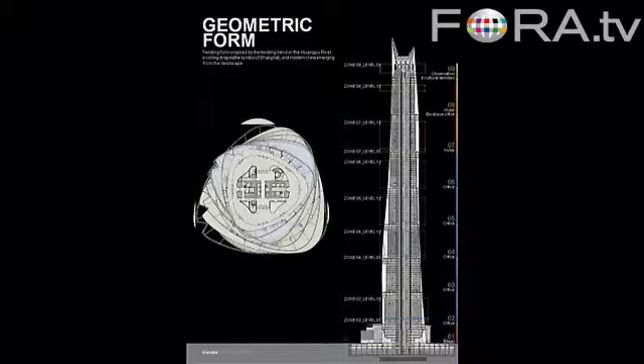The form of the building is really a combination of art and science. It's a twisting form inspired by the bend in the Huangpu River, a coiling dragon. Some say it looks like a coiling dragon, a symbol of Shanghai, and some say it is emerging from the landscape. I think it's really all of those things, and those are some of the metaphors we use. The science part is about shape and geometry, and it will be the world's largest double skin building.

It's pretty phenomenal. The exterior skin is actually going to be a cable-hung structure. It's a combination of office, hotel, residential, convention facilities, and entertainment and cultural space, tying into mass transportation systems at the base of the building. Currently, it is 632 meters, 2,075 feet.

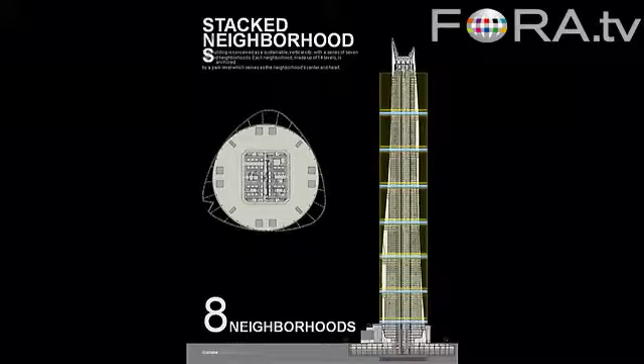The concept was a vertical city, a sustainable vertical city, a series of 8 stacked neighborhoods. Each neighborhood is made up of 14 levels, so basically it's 14-story buildings stacked on top of one another. Each of these podium areas, as you move from stack to stack, is conceived as a park, and Shanghai, as many of you know, is a city of parks.

Each park has a 14-story atrium space that brings fresh air into the building. It's going to work like a traditional park, with places to eat, entertainment venues, places to rest, really trying to create a sense of community.

It is really difficult to get your arms around a building of this size. What's interesting is that, unlike Mori's Tower and unlike the Skidmore building, Jinmao Tower, this one will be open to the public. All these public parks will be open, so it will basically be an open kind of format.

It has an intelligent skin, two layers of glass, actually two curtain wall systems. We designed a frit pattern and modeled it over the entire building, so the frit pattern changes from pane to pane as you move around. It's designed to minimize heat gain and maximize daylighting and views.

With a building of this size, one of the challenges we had was modeling what it's like looking through two curtain wall systems, when at some points they're 5 feet apart and at other points 30 to 35 feet apart. Visually, you start to get reflections from the outer curtain wall system onto the inner one.

There are wind turbines at the top of the building. This is really more symbolic, I think, in a lot of ways.

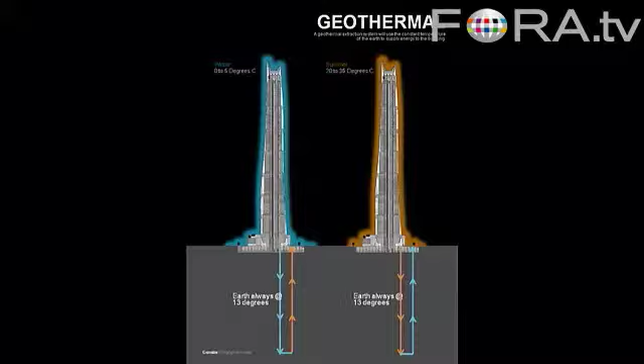There's enough energy that's going to be created to basically run all the exterior lighting in the building and much of the lighting in the park areas. We're utilizing geothermal energy, a geothermal extraction system. The building's HVAC is designed with a tri-generation recapture system and an ice plant.

Just in terms of water efficiency, we're going to harvest rainwater, recycle gray water. We're looking at black water. And yes, it is housed with low consumption urinals as well. Those are the simple kind of things. At this point in time, we believe the water consumption is going to be reduced by a minimum of 40% over a conventional design. That is 675 million liters annually, or about 245 Olympic-sized swimming pools.

I think what's most interesting is that it's actually one cylindrical building with an outer skin that turns. So the question is, how much did we want it to turn? Part of it was symbolic, but much of it was really driven by what is the most efficient form. As we started to model the different forms, a couple things happened. As you turn the outer skin, because the outer skin is triangular, it distorts along the edge of the building visually, so it looks like the building is beginning to wave. So that was a consideration.

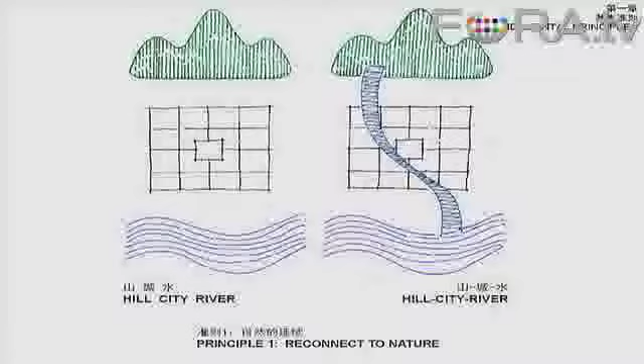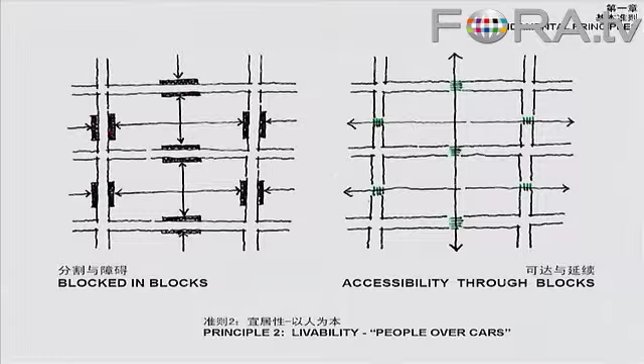The second fundamental principle is this is a city that's hemmed in by roadways where the car has dominated. We want people to dominate over cars, create throughways, and get people back in control of their environment, and in addition, to use more public transit.

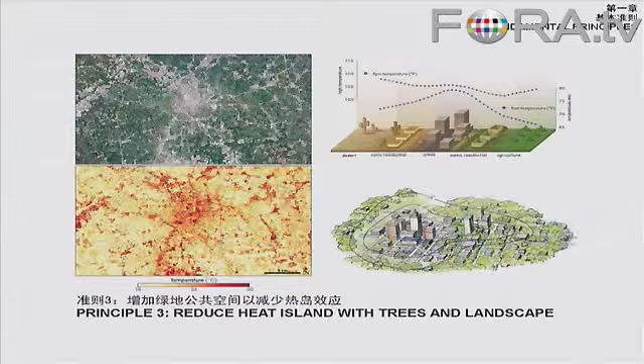The third is to really focus on the heat island effect. It's not talked about much, but cities generate heat by the very virtue of the impenetrable pavement and concrete that the buildings make. Cities like Bangkok, Guangzhou, and Shenzhen actually raise their own temperature because they do not deal with permeability in a good way. Of course, we also deal with the other issues of transit, general energy consumption, and water.

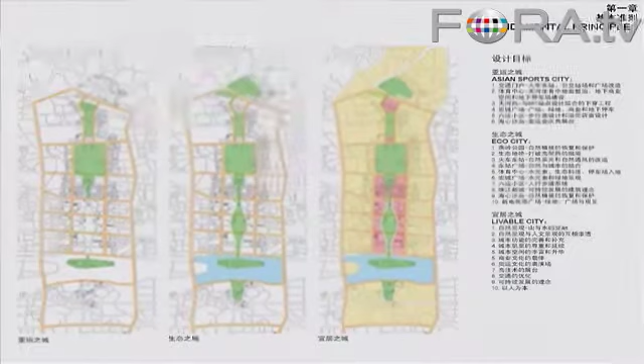So our plan is really three plans. The first is the Asian sports city, because we got to deal with the Asian Games. The second is the eco city, coming back to nature. The third is the livable city, which is the reconnection of the city to itself, instead of being divided up so that people can't go anywhere, and then jump in a car and sit in traffic — really bad traffic there. The way we affect these things is through a series of major nodes that will reconnect the city for pedestrians.

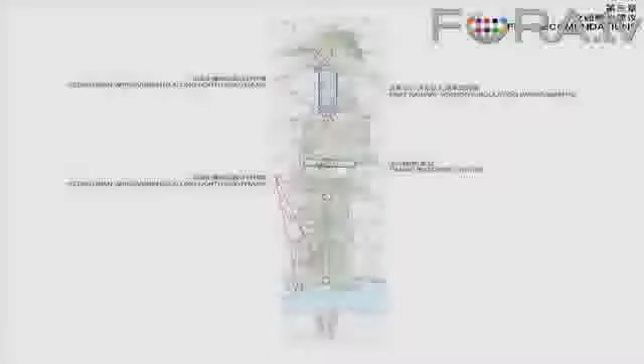First is from Yanling Park looking south. You cannot get from the north part of the city to the rest of the city very easily, if at all, because there's a major highway and railroad tracks, and the only thing they have now is a tunnel, with somebody there who charges a fee if you want to walk through it.

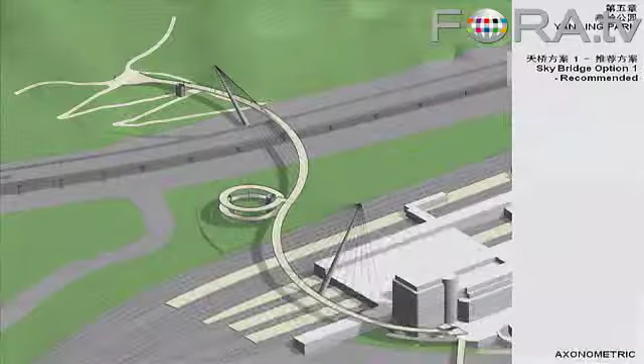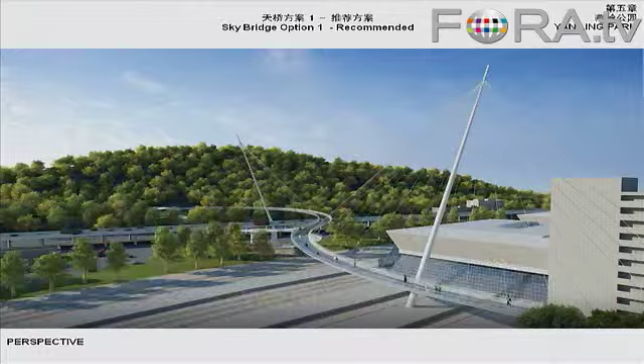So the first piece is to create a major pedestrian connection from north to south of the city, a footbridge which serves as a linking element as well as a kind of symbol of the entry into Guangzhou — it's been done beautifully many times worldwide. We've created a linking plan that takes you from the park and the communities on the north side to the railway station, which is the building in the foreground.

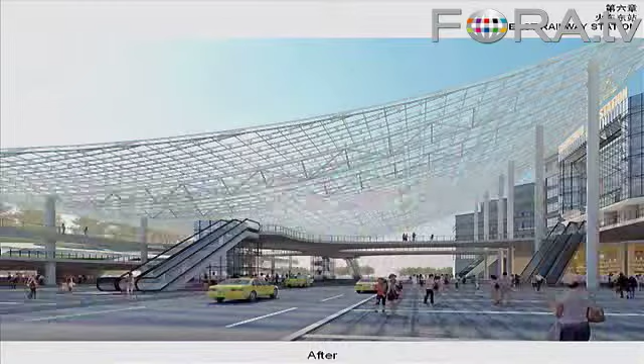So we completely redesigned this. We're tearing it all off and creating a real entry to the city, built of glass with built-in photovoltaics. Someone was talking about photovoltaics and their expense — well, this is a place where you do photovoltaics in a big way, because you need the shading. This place is hot, so the photovoltaics will not only generate a significant amount of energy, but will create shading as well.

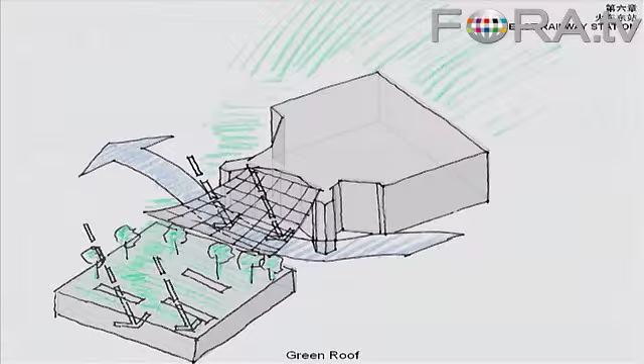And we get rid of the heat island, moving to a more ventilated situation. We also recognize the shading of trees, so the whole plan coming down through takes water and trees till we get to the sports center, where we redo it in the same way — changing this kind of thing using pedestrian crossings into a greener, more open place.

Probably the heart of it is here. This is a BRT station, Bus Rapid Transit, being introduced into Guangzhou. This is Tianhe Road today. It's a complete barrier. Our plan is to drop that road so people walk at grade over it, clear up traffic issues, and create a BRT station, a strong element which will encourage people to use it, linking not only to the sports center but to major shopping.

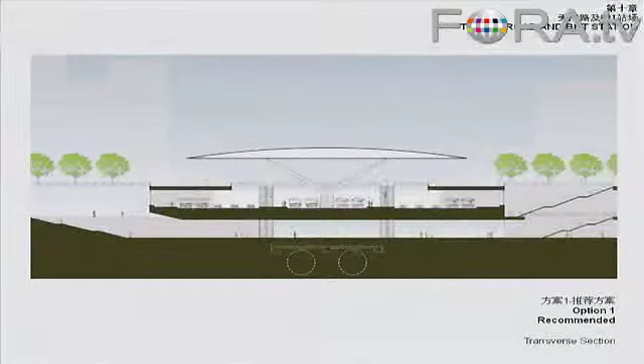Right now, this is the new Expo in Shanghai. This is an example of the kind of construction which can be done well and quickly in China, and the kind of thing that we do.

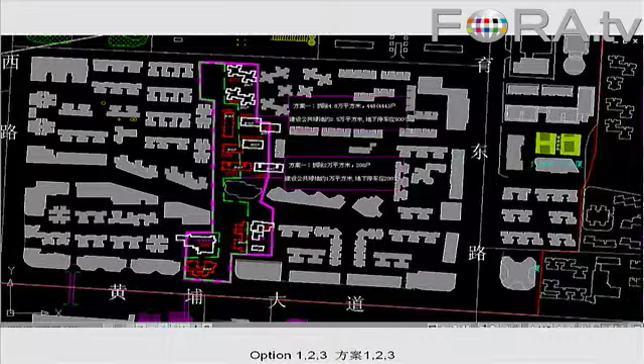The city was going to tear out a big chunk of the existing neighborhood, and what we went back and said is don't tear any of it out, just redesign it and create a major pedestrian way with retail integrated into the community. So we've put preservation as part of this.

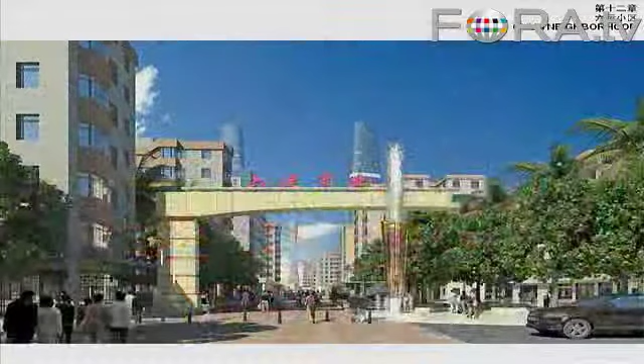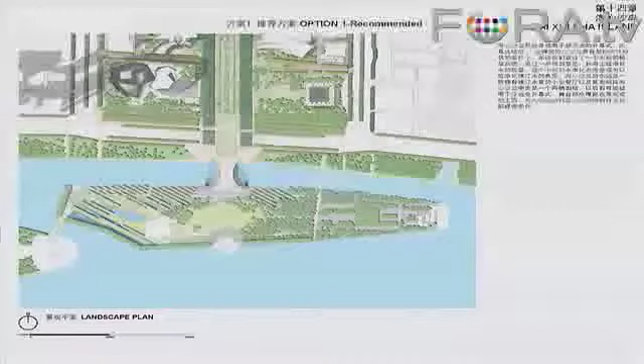Further connections, a bridge which replaces a tunnel. This is a road that couldn't be lowered, but a very elegant, light bridge. And other connections into town until we get to the island, where we integrate an amphitheater, then tie from the river all the way back to the mountain. So there you go.

I love architects, I gotta say. What an amazing profession. If I'm reborn, I want to come back to be able to do this kind of work. This beauty, design, living, all combined into this amazing thing.

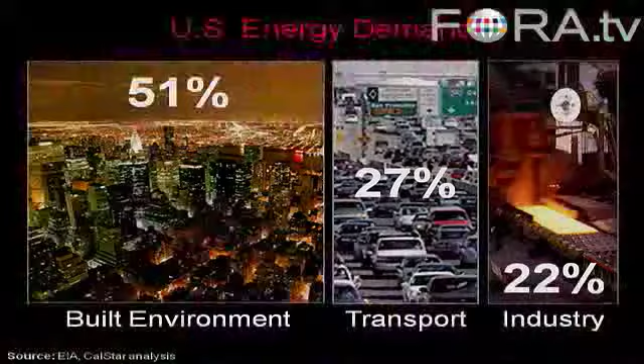The built environment stands as the 51% consumer of all the energy we produce in the United States, half the energy. And even more of CO2, the built environment is responsible for 55%. So there's no way we're going to solve energy issues, climate issues, and jobs and economic recovery, without taking a hard look at the built environment. That 51% means everything else, transportation and manufacturing, is the other 49%, with a tiny piece for agriculture. So it's really the big one to focus on.

Break that down. About 39% of total U.S. energy is used to operate buildings: cooling, heating, lighting, appliances, things of that sort. On top of that, there's another 12% of total U.S. energy embodied inside the materials that go into the buildings these chaps design in, that's cement, steel, glass, drywall, bricks, more or less in that order. So that's where the half comes from, and you see the breakdown between residential and commercial. A lot of it is residential.

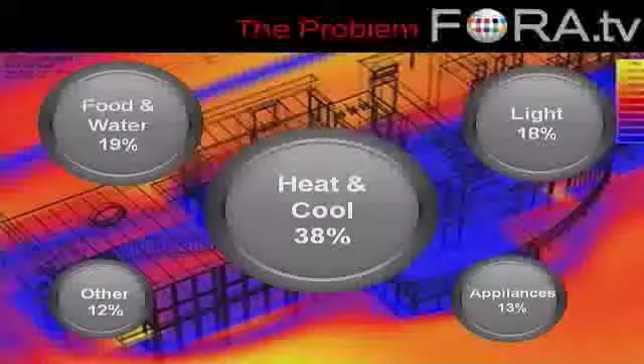Let's not forget that. The problem is well understood and well documented. We know where energy is being used, and we know where to get rid of it if we're talking about building scale. We'll soon talk about it at mass scale. Now let's take a look at this country.

These data are amazing, you probably know them. The new urban environment - people who want to move into urban environments in China - 350 million people, needing housing, shops, schools, stores, police stations and everything else. Coupled with the Minister of Construction's desire and NDRC's desire not to encourage urban migration, this means another set of infrastructure, housing and schools for 250 million people in the countryside.

That's the scale. Let me give you a sense of that scale in square feet. The United States today has 300 billion square feet. By the year 2030, we'll move to about 400 billion square feet. China is probably going to build 400 to 500 billion square feet new in the next 20 years, both urban and countryside. So China is going to build approximately one to two United States in the next 20 years.

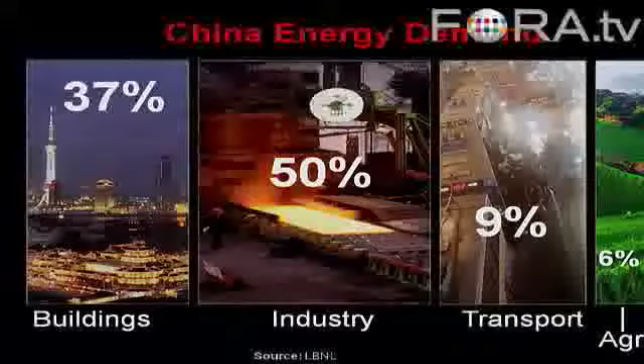Okay, so let's take a look at China. 37% total energy, outsized in terms of climate change and greenhouse gases, because most of China, as you well know, is driven by coal. And so that explains that. Here's how the breakdown manifests itself: 23% in operations, again mostly residential not commercial, and another 14% - actually more than the United States - in buildings and infrastructure, which goes for cement, steel, glass, and things related to that.

Let's talk about China - these data are preliminary, courtesy of work that I did with Mark Levine and some of his team. They're subject to change, but they tell a story that directionally is very, very important and quite dangerous. So if you want to pay attention, this is the time to do it.

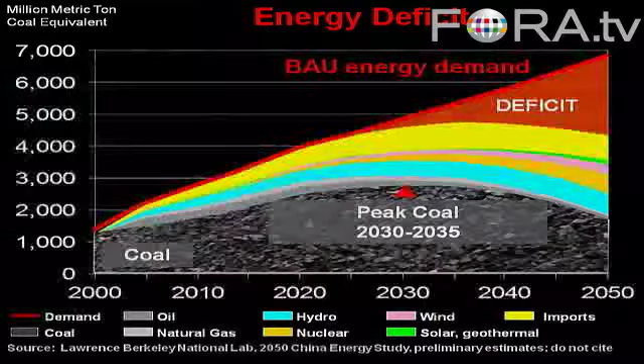An energy-driven deficit means an energy-driven recession. The fundamental contract that the government has in China, as we all understand it, is that we supply continued economic well-being on a per capita basis, and the people give us their loyalty and their obedience, more or less. I apologize for abstracting that so much, but that's the idea - our job as government is to provide increased well-being, and we're not going to be able to do it with an energy-driven recession. And that recession will come if we don't solve the problem.

Question: how do you solve it? You either increase the supply of energy - and some of us, theorists and practitioners, think it's going to be very hard to exceed these numbers, very hard to create more supply - or the obvious other place to look is to reduce the demand. One has to reduce demand in the three major sectors: the built environment, manufacturing - meaning both the style of manufacturing, the technical processes, and also the mix of what it is we're manufacturing and exporting - and transportation. If we hit net zero energy, a very difficult goal for any country including China, although China is reasonably well equipped to begin prosecuting standards.

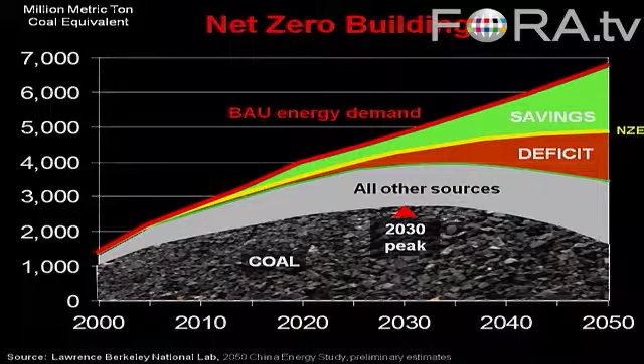If we hit that, we might be able to decrease the deficit and the energy-driven recession that we see coming for China by maybe 30, 40, or as much as 45%. A big deal, a very big deal. That's what we have in mind for China, and that's why we're promoting net zero.

Current course and speed, danger path. The way the built environment is coming together, the tremendous explosion of residential and commercial, urban and countryside, spells danger. Those buildings will substantially, unless they're Gensler buildings or Heller buildings, look like Western buildings. They will eat China out of house and home.

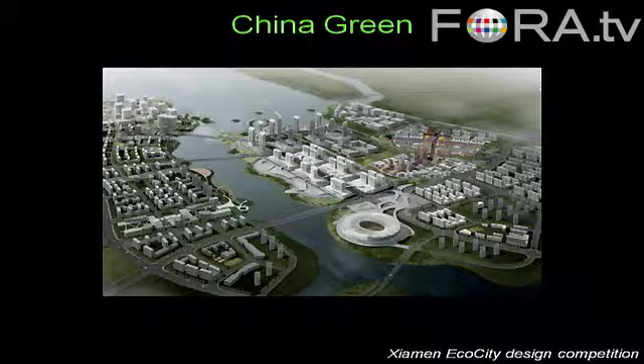A big danger. The other path is obviously the one we're discussing at this conference, and what we all hope we focus on really intently in the coming years. China Green is a dream. There are various examples - some are successful, some are less successful, some are just talking, some are actually being built.

And there's great reason to think that there can be China-US cooperation. Let me surprise you and say that China, for its own purposes and its own requirements, is developing and will continue to develop a clean tech industry, and a lot of that will be focused on the built environment because it has to be. We might be the ones that are recipients of Chinese technology and Chinese practices and Chinese methods.

It's not a one-way street at all. China has the scale, we don't. That's already been mentioned today. So expect to see a China-USA cooperation, which is very much a two-way street, maybe a lot of it coming from China. And what's necessary to make China Green happen?

Let's develop net zero energy goals for the new built environment for China, for sure. Going backwards and retrofitting the existing one probably doesn't make sense. But for the new built environment in China, let's promulgate and make sure that we prosecute at the national, provincial, and municipal levels net zero energy standards, goals, and policies, put resources into compliance, help with that. By the way, some of these buildings should be self-reporting to make compliance easy.

Definitely allow the market price of energy to reflect its cost. We are working hard globally to try and put a limit on carbon so that it more accurately reflects its true cost. The fourth, there is a big stimulus package of $586 billion that is going in part into energy efficiency at the rate of $12 million an hour in China. An hour, which is good news. And then obviously support the upcoming round of negotiations and into the future on climate change.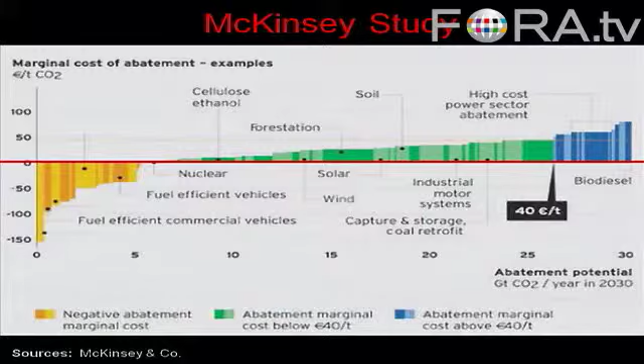That would be our view of what's necessary. Now, very quickly, in the remaining 2 minutes if I have, okay, very, very quickly. In the built environment, the good news is everything can and should be reinvented. You're familiar possibly with the McKinsey study, which takes a look at this very question. And if you look at the lower left-hand corner, you notice that most of the goodness is in the built environment. Look at this list of things.

And with that idea, we've created several companies. Paul is board member of one, Serious Materials. He was just in the White House. We have another one, CalStar. Data point: all passenger automobiles in the world, of which there are 700 million, emit 2.8 billion tons of CO2. Same for cement - it's the same number. Think of how much effort is going into biofuels and so on. China is about cement. We have to reduce it, and so we're going to market with some products this year.

Zeta communities, affordable housing, and net zero. This is a model that China will replicate. It will take over. There's no question in my mind that China will begin to do this. Low-scale housing, low-density housing, and also tall buildings that first reduce the demand by 70%, and then whatever's left over, we add some other techniques and technologies. First reduce the demand, then top it off. And they're being built as we speak in a factory in San Leandro. Thank you.

Well, I think we get the picture now. That was really great, Mark. Thank you. Obviously, there's huge challenges here and tremendous innovation and much more clarity coming about what we need to do to address the changes that we're experiencing in the world and the crises.